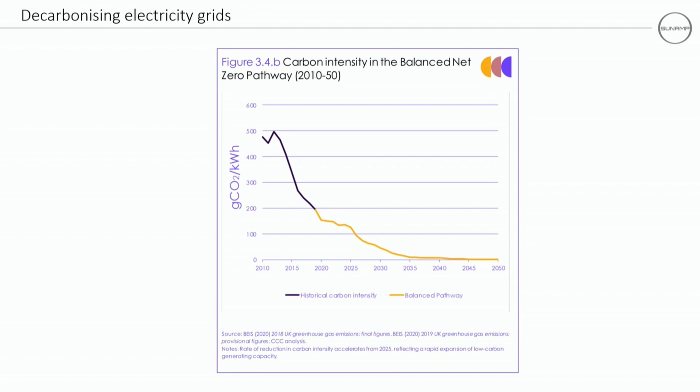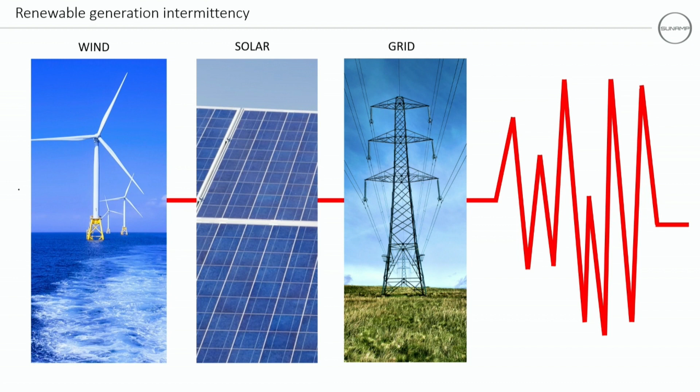Storage on the demand side - whether that's EVs, thermal storage, hot water tanks, night storage heaters, electric batteries in people's homes, some part of industry, or a tar store for the roads which can be heated sometimes and not others - that's all important. It's all delivering a demand-side response to that intermittency on the supply side that comes with more and more renewables. And Orkney, mentioned earlier, is leading the way in a lot of this stuff, as are many other places.

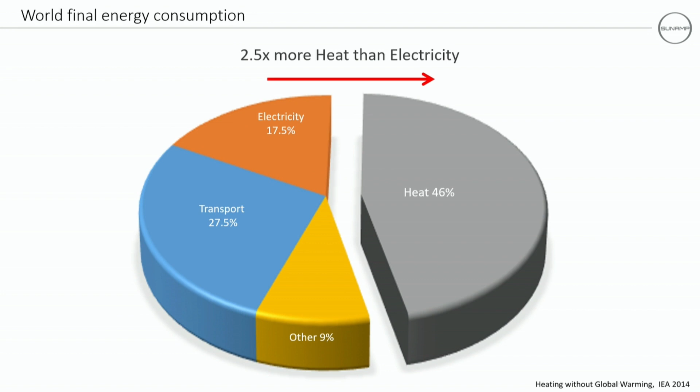When we looked into the statistics - this is 2014 data from the International Energy Agency - we tend to think about electricity as being the big thing to solve. Actually, it's not. Transport is much bigger than electricity in terms of final energy consumption, and heat is even bigger again. So we felt pretty good jumping into heat energy storage as our domain.

And now, brand launch - I'm going to tell you about our Plentigrade platform.

So if we go to the next slide and play the video, effectively we start with the energy type of energy storage that's in a hand warmer. Could you play the video, Neil? Thanks. So a hand warmer converting from liquid to solid warms up. You can throw it in a pan of boiling water later, you can recharge it. So that's essentially the inspiration we took. We said, that's a reusable device.

Unfortunately, what you'll find is that although it's got roughly 4 times the energy density of hot water storage, which is really good, it's actually quite unstable. The materials can be cycled 10 times, 20 times, or something like that, and then that hand warmer is going to stop cycling. And there's other problems with some phase change materials, like flammability, toxicity, or they're made from palm oil, or various other things that we just thought were kind of wrong.

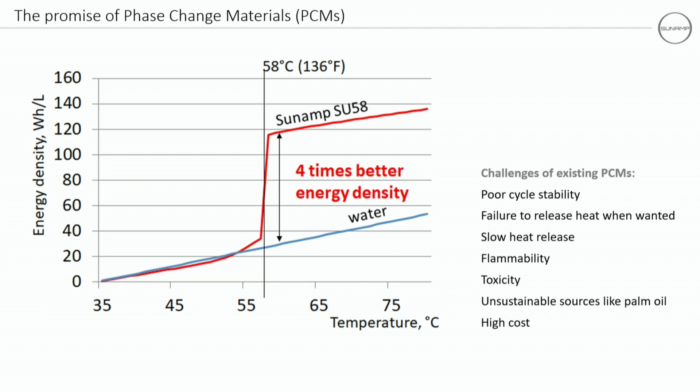So we worked with the University of Edinburgh and tested ourselves at the Diamond Light Source, which is a large synchrotron facility in the UK. We were able to look right deep into the crystal structure of the materials, and we developed a new material that allowed us to have 40,000 plus cycles. So we've gone from 10 cycles, maybe 100 if we were really lucky, to 40,000.

40,000 cycles at 2 cycles a day, which is roughly what you need for hot water, is about 50 to 55 years of use. So while I'm not saying that our heat batteries will automatically last 50 years in your house, the material will. And it may well be that products we've installed in these last years will still be in use well past 2050. I very much hope so.

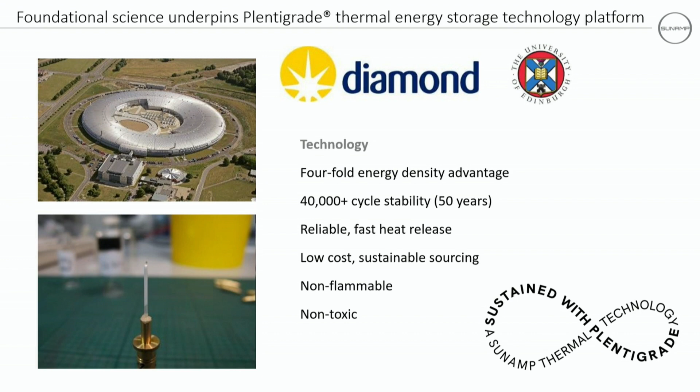And we could get all that reliable heat transfer, low-cost sustainable sourcing, non-flammable and non-toxic. So we've created this logo which sort of indicates a kind of almost infinite cycling, because we think that's basically what we are delivering.

If you go onto the next slide, you'll just have to go through each stage of this, Neil, please. We actually started with some work done by Joseph Black back in the 1700s, a professor at the University of Edinburgh, also at the University of Glasgow at another point, and he did two things that are quite interesting. He discovered carbon dioxide, which in a way sets the problem, and he also discovered latent heat.

Latent heat is hidden heat. It's the heat which is there when you go from the solid to the liquid or the liquid to the gas. So when you go through that kind of phase transition, you are absorbing heat and yet the temperature doesn't rise. He called that latent or hidden heat, and we use that principle.

We then build on the work of Maria Telkes, a fantastic Hungarian-American biophysicist who worked in the 1940s, 50s, and 60s in the US. She built the Dover Sun House, which was the first fully solar-heated house, we think, in the world, and it used phase change material, latent heat storage internally.

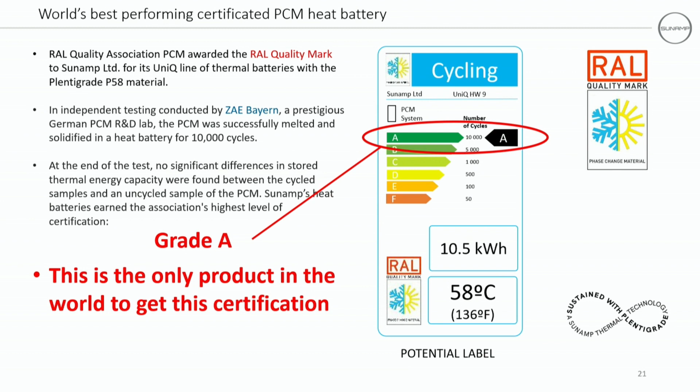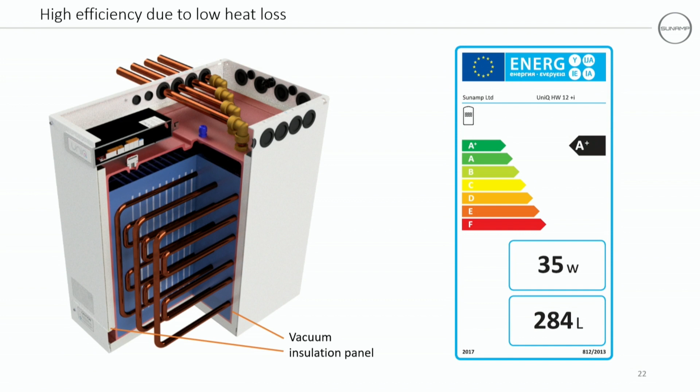That ERP label is going through a cycle of adjustment. A lot of vendors of water tanks, which we compete with, have been pushing to lower the energy efficiency requirements to get a top grade. We've been pushing the other way. We say the European Commission should be pushing to raise the standard so that everybody has to try harder. And if everybody has to try harder, we'll try harder and we'll get an A+ or an A on the new label.

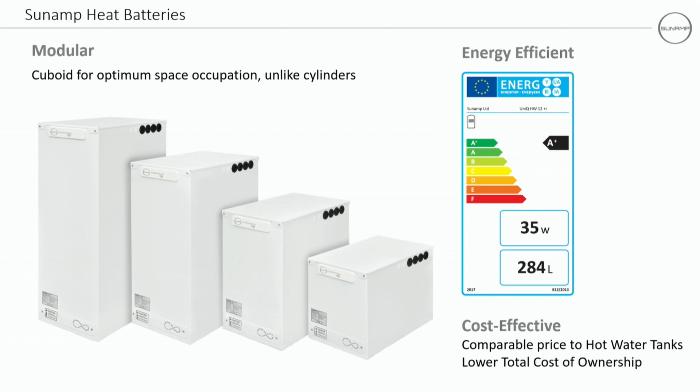So what we end up with, if you go to the next slide, is a modular family of heat batteries ranging from about 14 kilowatt hours capacity down to about 3.5 kilowatt hours capacity. Comparable pricing to hot water cylinders that they displace, but in about a third of the size. I'll show you that as we go on.

If we go to the next slide, I think we'll just briefly dwell here. They can be heated internally from an electric heating element, so in some ways they are directly compatible with demand-side response, with off-peak tariffs. In fact, in my house, they are charged at the same time as the electric vehicles. But they also have this high-power heat exchanger, so they can get really high output performance.

And again, a little bit of a sneak peek of the brand launch tomorrow - we're calling this Thermino going forward. Up till now, people have known it by another name.

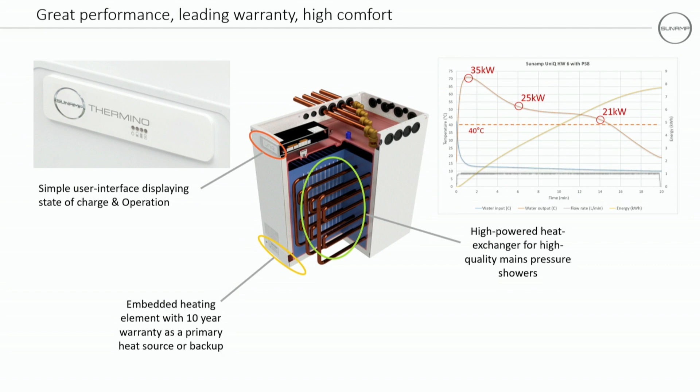If we go on to the next slide, you'll see what the impact of that high efficiency is. We can save about 1 megawatt hour of electrical input a year compared with heating up an electrically heated hot water tank that's already in somebody's house, maybe for the last 10 or 20 years, with relatively low grade insulation around it. So while we wouldn't encourage people to throw things out that are perfectly good and serviceable, when people come to the replacement point, they should definitely be thinking about something that saves 1 megawatt hour per year of electrical input.

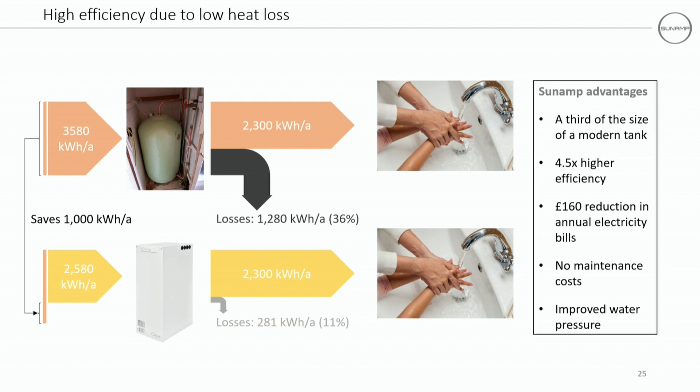And this is what we mean by compact. On the left is what we compete with - a really great hot water cylinder, a Heatrae Sadia Megaflo, top brand, no problems with that. We produce the thing on the right, does exactly the same amount of hot water, does it with an A+ rating. The Megaflo is a B-rated cylinder, and there's a lot less pipe work to fit with ours because we aren't actually a pressurized water cylinder - we're actually a thermal store.

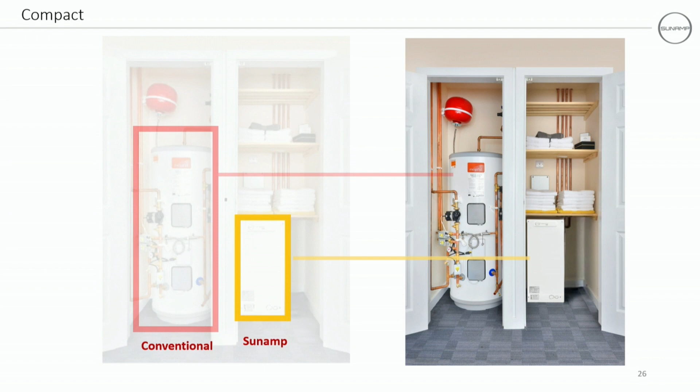I want to show what that boils down to in real life and why it makes a difference to decarbonisation. So here we have in Sunderland, a little bit south of here - seven tower blocks with 364 apartments, very small cupboards and closets to put equipment in, and a need to get rid of the combi boilers that are up on the top left.

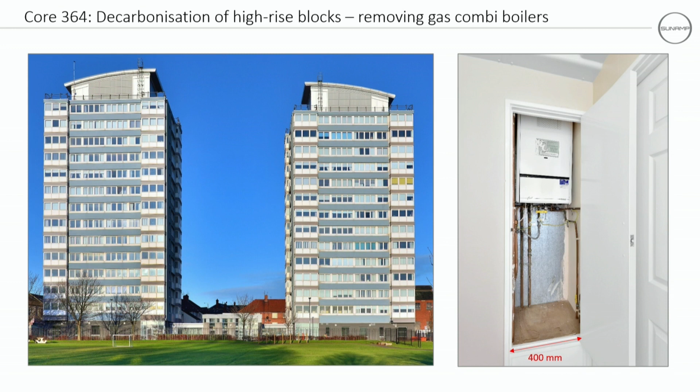We replaced them with - if you go on the next slide - where would you put that tank? Nowhere, it couldn't go in that property. But instead we're able to put the heat batteries in the closets and combine them with the very compact shoebox heat pumps from partners Kensa. And that works together with a ground loop that's shared across the building.

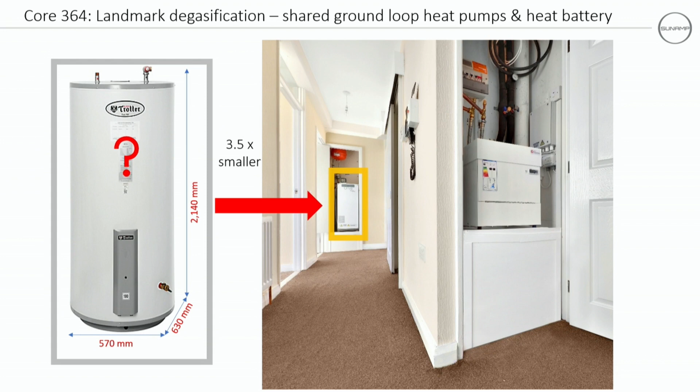That solution is now deployed in about 1,000 properties so far. Tower blocks are a really, really difficult location to decarbonize, and we're working very hard to get as many of them decarbonized as quickly as possible. And we can do the same for air source heat pumps as well. So let's keep moving on through the next one.

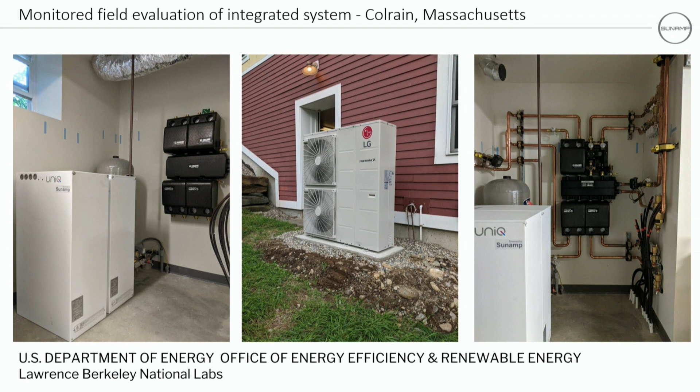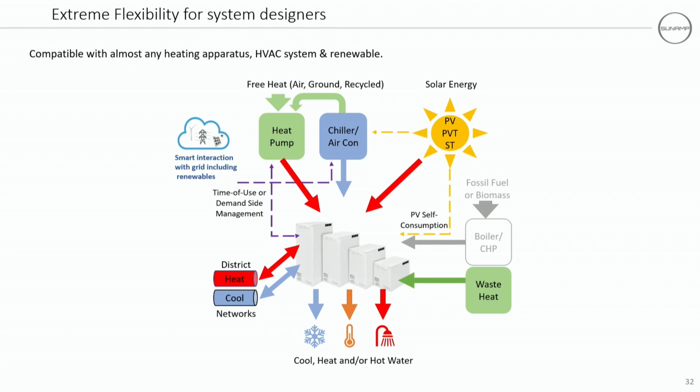And here I'd like to turn back to vehicles for a moment, if we can go on the next slide.

Gary, are you here? You said you might be. Excellent, good. So could I introduce Gary Hayes? Gary, maybe stand up for a second so people know who you are.

CampervanCo is a partner of ours, and they're developing a zero emissions recreational vehicle, a Zero RV. It uses a plug-in hybrid currently, with a full electric version coming beyond that. So if you go on the next slide, when it's plug-in hybrid, there's an engine there.

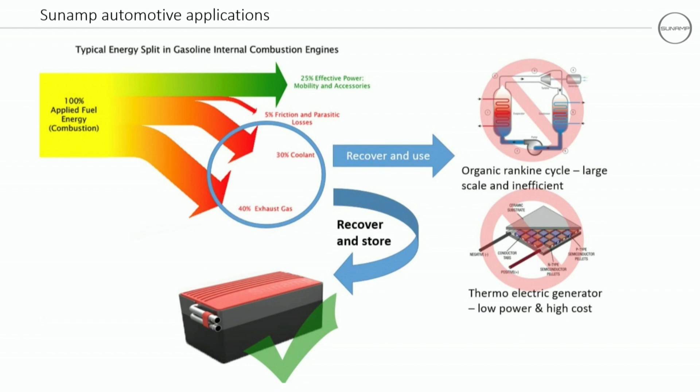Lots of people look at ways of reusing the waste heat from engines. They talk about doing organic Rankine cycles, thermoelectric generation to electricity. Actually, in our view, the best thing to do is to save the heat into a heat battery. If you go to the next slide, you'll see what Gary then does with it - he turns it into the supply of heat and hot water in the RV. Makes a lot of sense.

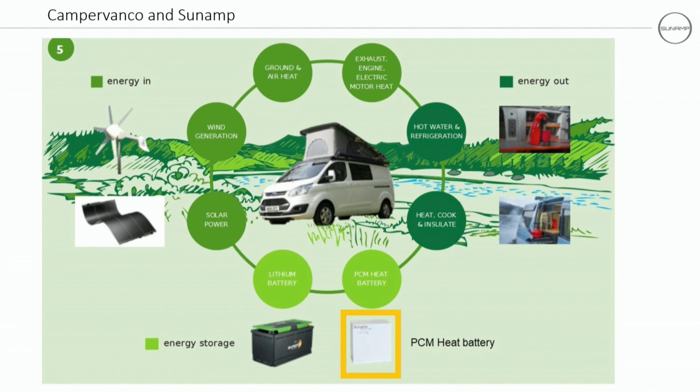And in future, that's going to be fuel flexible, so it will be able to charge from the grid when you're plugged in at a campsite or an electric vehicle charger, it'll be able to charge from PV, and it will be able to charge from engines where fitted. So we're really proud that we're not just for the built environment, but we're also for EVs.

We're also doing big things. Coming middle of next year, you'll be able to buy a megawatt hour plus scale containerized heat battery. That will be available in multiple temperature grades, ranging from -30 Celsius for refrigeration and cold storage, all the way up to about 120 Celsius for low grade steam production and high temperature hot water production, and all the temperatures in between. Over time, we'll extend that range.

That's going to go into things like district heating. It's going to go into wind, power to heat, essentially wind to heat propositions. It's going to go into industry, and it's going to be, we think, pretty important.

I was also asked to talk for a minute about COVID vaccine distribution. That might seem like a pretty strange pivot, but give me a minute on this. This came out yesterday - it was Gordon Brown and a number of other global leaders pitching to the G20, ahead of COP26, around the fact that we're being too slow doing the vaccine rollout into the developing world. The wealthy countries, probably most people in this room, maybe everybody, has had 2 vaccine doses.

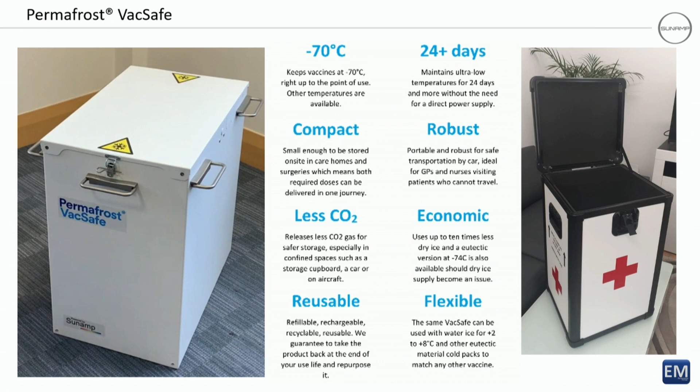Subsequently, we've worked with partners Eco Mirage in the UK, and they're turning it into something much more robust, much more oriented towards, for example, rapid response military deployment, rapid response civilian deployment. They're working with the International Red Cross and so on. So we are working hard still on this agenda, and actually we're very keen to make sure this technology gets out there to support what is still a very live agenda - the need to get the vaccine out to a global population, not just the population of our wealthy countries.

So we're all about accelerating global impact. We're working today across the world. We've developed a second factory in Korea. We're working on large projects in China. We're working on global vaccine rollout.

We're working on UK projects. We've just kicked off a project with NYSERDA, the New York State Energy Research and Development Authority, across in New York State to do 8 commercial demonstrators there, which will be the beginning of our entree to the US market. We've sold 15,000 heat batteries to date, and actually the pace of that is accelerating rapidly. We've signed up key OEMs and international distributors.

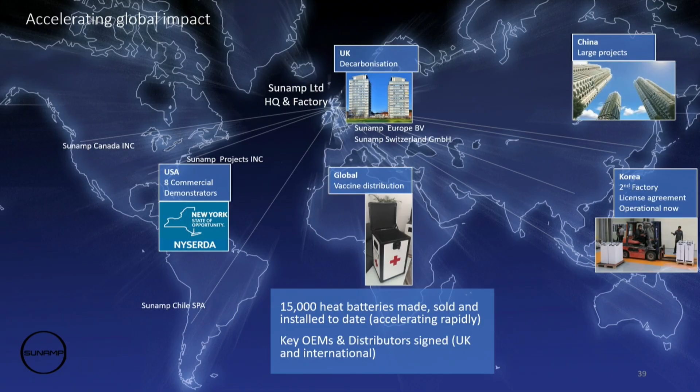On the last page, you'll see that for us, this is still about realizing a vision. It's not just about making lots of money, because if it was, I'd have gone and retired by now. We seriously think the world needs a massive amount of thermal storage. It's going to have to be compact because people are living in compact places, and equipment rooms in industry are compact and so on.

We've seen a huge impact, bizarrely for us, from the pandemic. Our order book grew 500 times during the pandemic, to £100 million from £200,000 before the pandemic. I think a lot of people, in the early days of the pandemic, thought really hard about what was important, and maybe made choices they weren't previously making, which has been good.

We're targeting to get to 1 million products a year by 2027. That's about 2% of what we really need to be doing to make the impact. So if we can accelerate that more, we will.

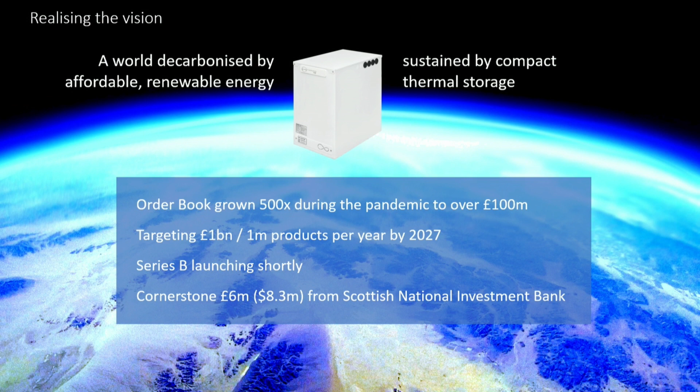We've raised some money. We're delighted that Scottish National Investment Bank supported us with £6 million a few months ago, and we'll be raising our Series B into the beginning of next year. But ultimately, the money is to make the vision happen. So if you go on the last slide, we're on a mission to enable renewable heat with compact thermal storage. Thank you very much.